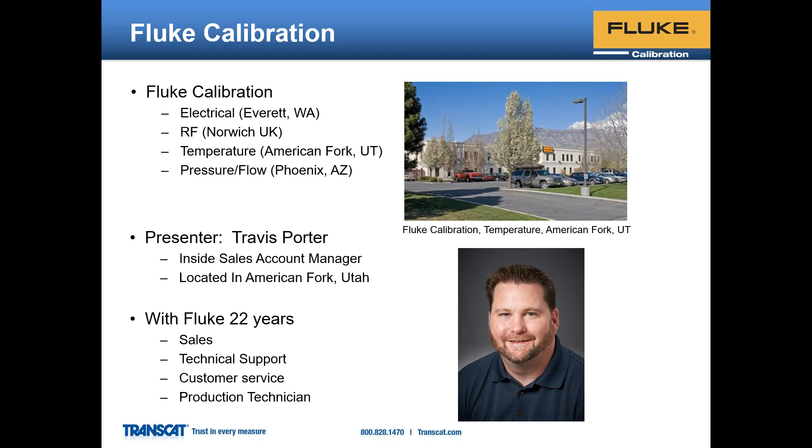Welcome everybody to this presentation on maintenance tips for temperature calibration equipment. Just real quick, I do have a little bit of allergies, so if you hear me quickly mute, it's probably because I had a quick sneeze come on. I'll do my best to avoid those, but basically we're going to talk about the equipment you've invested a lot of money in for your calibration lab and how to do some preventative maintenance. This is key to keep the units running at their very best and helping to reduce costly repairs and downtime.

So here's the agenda. We're going to start with our calibration baths, move to Drywells, and then to micro baths. So we'll get started on our big baths or standard baths.

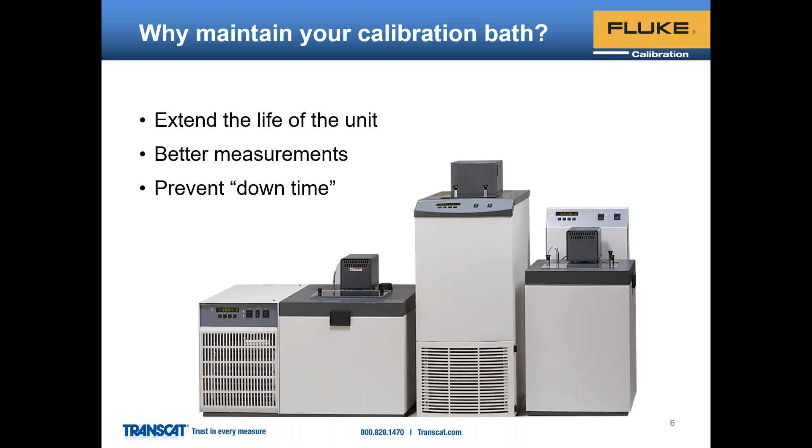Why do we want to maintain our units? Well, it's going to extend the life of the unit, provide us with better measurements, and prevent downtime or basically any untimely repairs that we were not prepared for.

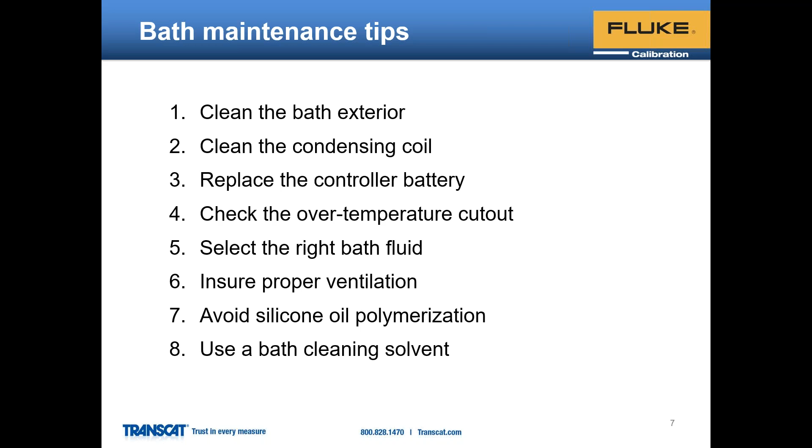We're going to go over some basic tips of cleaning the bath exterior, the condensing coil, and then we'll jump more into some of the controllers internal to the units, and also check the over temperature cutout and why that's a good idea. This will lead us into more general topics of selecting the right bath fluid, proper ventilation, what is polymerization of the fluid, and then a cleaning solvent if you do happen to have a problem where your oil does polymerize.

Basic maintenance is key. You don't want to spray anything directly onto the bath; you want to put it onto the towel or cloth being used. Ethanol works very good for a lot of the silicone cleanup and doesn't usually hurt the paint in any way. OS2 is a chemical you can get from Dow that helps dissolve silicone residue and silicone oil that's polymerized.

We'll talk a little bit more about that. When you're wiping, again, just wipe away all the silicone from the top of the unit. Another tip is when you're removing the probes from the bath, instead of coming straight forward and straight back, sometimes it's a good idea to go left or right. This way it avoids any potential fluid dripping down onto the controller at the front of the bath. Periodically wipe the unit down to remove the excessive silicone oil.

Silicone oil does creep - it gets everywhere. As it's used at higher temps, it kind of evaporates and condenses, so that's a reason for that.

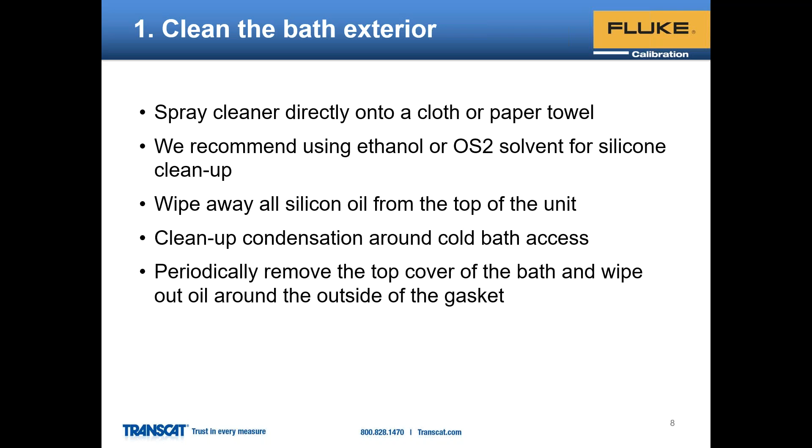You can also periodically remove the top cover of the bath. The baths do have a seal - it is not a liquid seal, but more a ventilation seal, where the lid sits on top of the tank. It is good practice every once in a while to wipe the oil out from underneath there to prevent any silicone creepage coming down the sides of the bath that may have condensed over time.

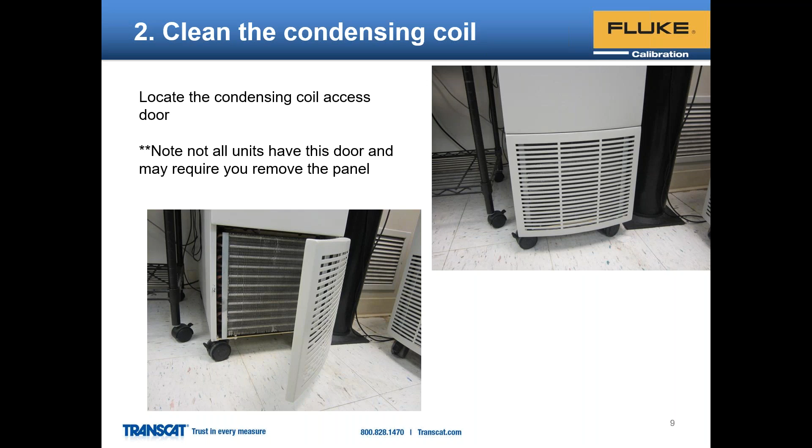The next thing we want to talk about, probably the most productive thing to do with your baths that have a condensing coil, is to actually clean these. Some of our baths have a door or access panel, like this one in this picture. Some you do have to remove the panel, usually just a few screws to remove that, and then you've got your internal condensing coil. You'll need to locate that based on the type of unit you have and whether you need to remove a panel or if it's got an access door.

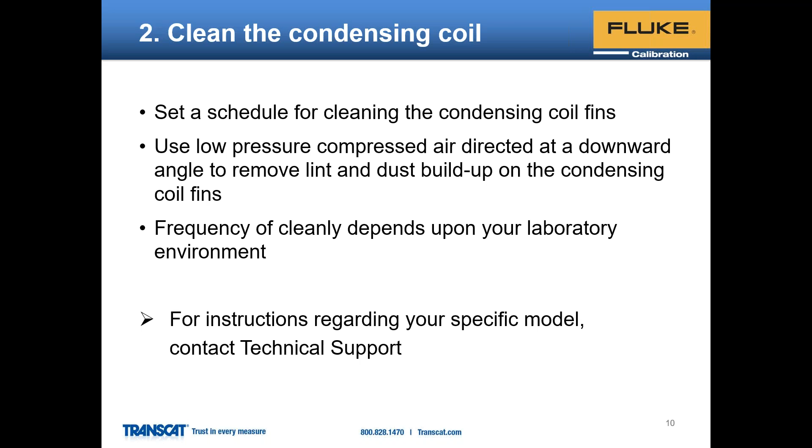It's really good to have a set schedule for cleaning the condensing coils and fins. This is relevant to the type of environment you're in. Most labs tend to be fairly clean, but I do have customers using baths in more of a production environment where it's not as clean, so dust and debris tends to build up more quickly on the condensing coils. Depending upon your environment, this may or may not be something you need to do monthly, every few months, or quarterly. It's up to what you deem necessary in your quality or maintenance scheduling.

Once you have access to the coils, you're just going to use a low pressure air source and blow off the debris. Some people will use a vacuum in tandem with this, as they blow it, they will vacuum up the dust that comes out as well.

If you notice any of the fins have become hit or bent, you can purchase a fin comb and give these a quick brush, and that will straighten the fins back up. With that, I would suggest, if you've never seen a fin comb used, to look it up on YouTube, because when you fin brush those, you are dealing with a really small gauge aluminum, so you've got to take some care in doing that, because if you jam it in there, potentially you can damage the condensing coil.

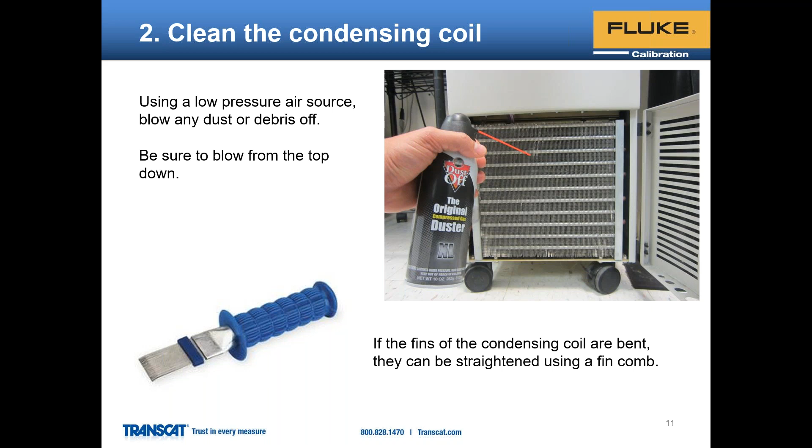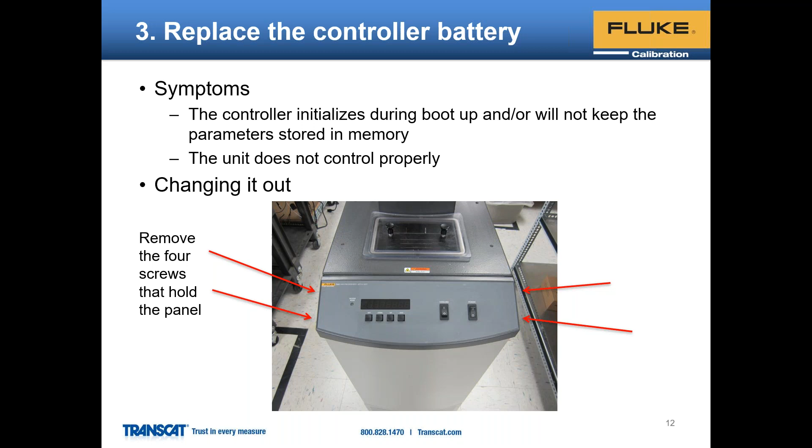There's a couple things you may notice that go wrong with the bath over time. Sometimes your controller will always say initialize, or show a short INIT every time you power the unit up. This is where your internal battery that controls the non-volatile RAM has kind of lost its charge. To get to this, you're going to remove the 4 little screws that hold the front panel on, and then the front panel will just lift, and you can hang it forward like in this example. Then it's basically a 3-volt coin battery that's on the display board.

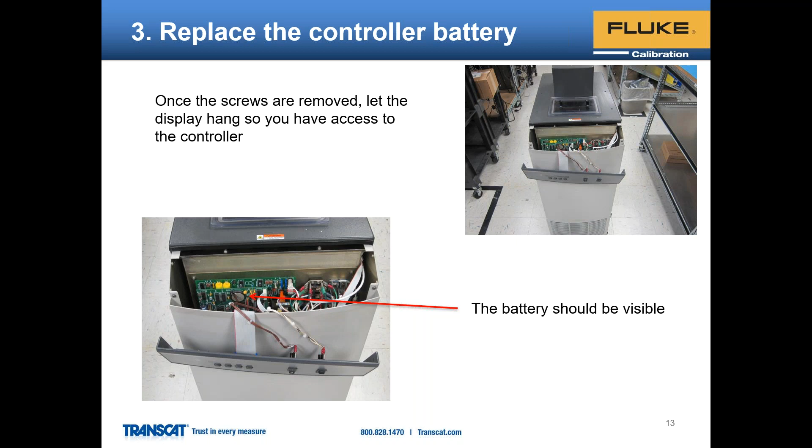When you're doing this, you want to have the unit not connected to any AC power. You don't want to be in there poking around with anything energized. Again, this is a 3-volt type coin battery. When I was in production, we would always make sure they were 3.3 volts or higher before we installed them. But to remove them, it's pretty simple, you can just use a little flat blade screwdriver to pry up the pressure fit and then slide it out.

Typical lifespan on these batteries is 7 to 8 years, I've even seen them go 10. It just depends on how much the bath is being powered on or off. Once you get the new coin battery installed, you will just, in reverse, set the display back on and install the 4 screws that were used to remove the panel.

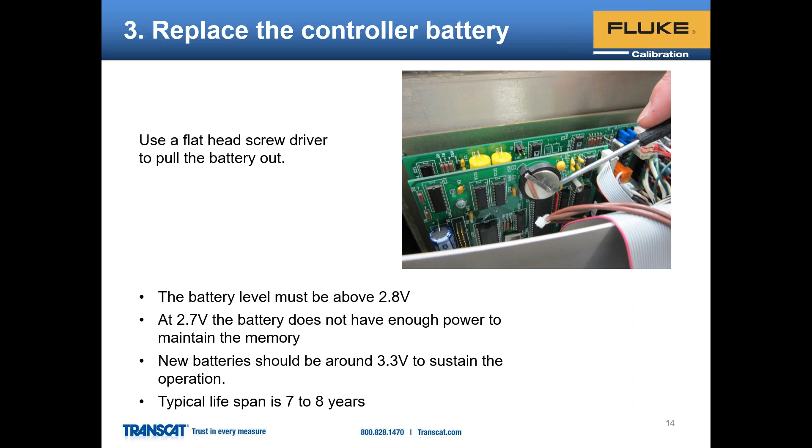The next thing some people will adjust, depending upon the bath and fluid, is the over temperature cutout. This is a built-in safety feature of the baths, all of them have that. Usually at the factory, the hard cutout is set at just a few degrees over the maximum temperature of the bath, because you want to be able to go to your max temperature but not bump into the cutout. But some people will limit this, or use the soft cutout setting, based on the fluid type they're using, so they do not overtemp the fluid. It's also sometimes good practice to set this down to a point where you will bump into it, just to make sure the temperature cutout or soft cutout is functioning.

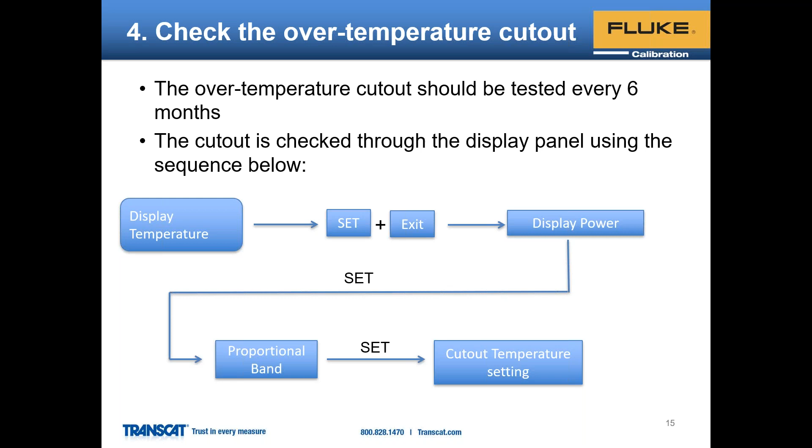To get to this setting is quite simple. You're just going to have the bath on and functioning, and hit the set and exit keys simultaneously. Once you do this, the unit's display will show a % power, which is for the heater controlling the bath, and then you'll hit set again. This will give you your proportional band setting, and if you hit set again, it'll say cutout, and there's the set point there where you can use the up or down arrow keys to take that set point up or down.

This is again something that most people will adjust based on the type of fluid that they're using, so they do not inadvertently overtemp the fluid. A lot of our baths have more capacity, and there is quite a variety of fluids in the industry. Unfortunately, we don't have a single fluid that works from very cold to very hot that we can use to get the performance specs that we need.

More or less a safety feature. Just in case something goes wrong in the bath, for instance, it runs into a thermal runaway situation - say we lose a cooler, and then it's just continually heating - this should cut out the power to the unit.

When the set point is bumped, the display triggers the relay, and it'll go into a flash cutout, and stay in that mode until the temperature of the bath comes down below that, and then it will reset that parameter and allow the power to go back through the circuit. So again, just something to check periodically, make sure it is working.

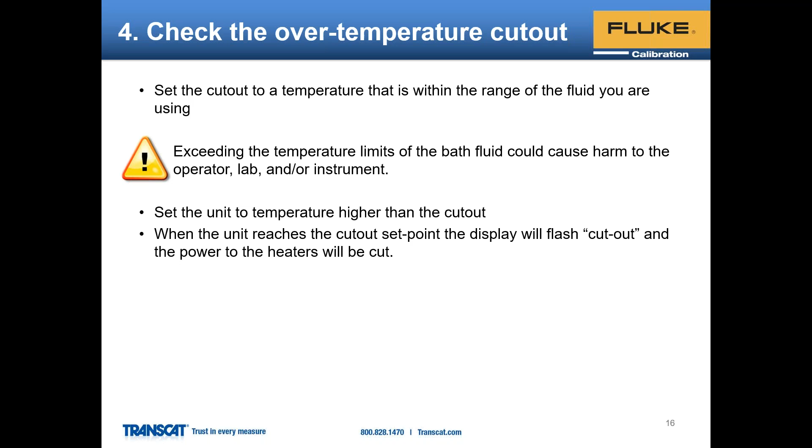Along with the cutout, we talked about different types of fluids. Unfortunately, we don't have something that performs as good as alcohol at -100 and as good as the bath salt at 550C. So a lot of times you have to use a variety of fluids, and usually this is temperature dependent on where you're going to be performing most of your test points.

Going off this sheet here, it kind of goes from the halocarbons and alcohol and the Dynalenes, which are usually typically used for more cold applications. Then you can get into the ethylene glycol or antifreeze and silicone and mineral oils, which are kind of middle of the road. And if you're running consistently above, say, 220 or so, a salt bath is actually the better solution long term.

Even though there's a little more investment up front, you will make that back in spades as far as the replacement of mineral oil, because most mineral oil, even the types rated for 300C, has quite a short life at that very top temperature range as the polymers bake off, and then they do start that polymerization buildup or polymerization chaining process.

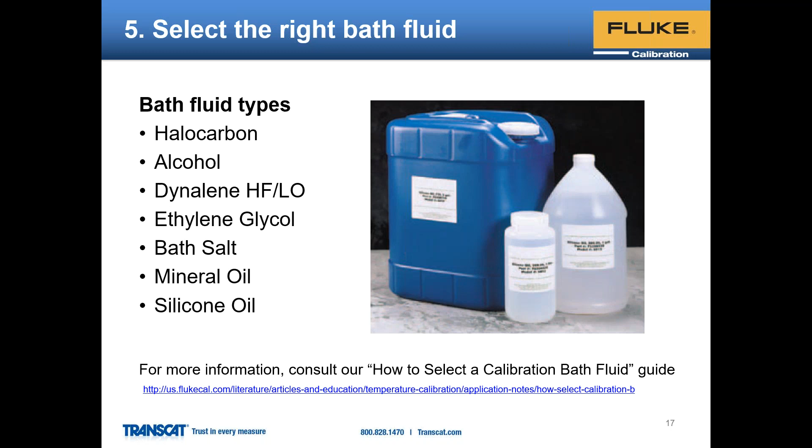One thing that can happen in the cold fluids, most common when using alcohols or ethanol, methanol, or halocarbon, is water can build up in the fluid and basically cause icing. When this ice forms, the cooling capacity of your bath is going to be degraded.

Depending on where you're holding temperature to, and how long, and what the conditions are of the lab or space that you're working in - I've seen alcohols ice in as little as a month where they have to be replaced, or I've seen them go almost a year, about 9-10 months if you're in a fairly dry environment.

One thing we did notice in our lab is that ethanol versus methanol, the ethanol does saturate at a much higher rate than methanol. But there are some considerations when using methanol, and some people don't like the additional safety concerns that need to be considered.

The other thing too with halocarbon is you can actually turn off the bath and just allow the unit to sit, and the ice and/or water in the fluid will actually separate and float on top of that, and it can be ladled off.

Once you get the majority of it ladled off, you can then slowly heat the fluid up to around 90C and approach close to 100, and boil off the remainder of the water that's condensed into that type of fluid.

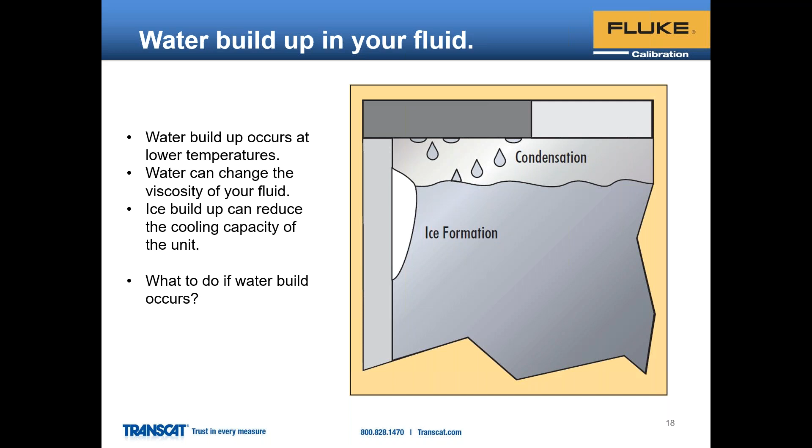With any of the baths, and this is more typical for the hot baths where you're using oils that off-gas or the salts, you do want to have proper ventilation. We do have a fume hood recommendation based on different oil types, so if anybody needs that, that's on our website.

Basically what we've done in our lab is we have about a 600 CFM fan that vents out, and then we basically created a trunk with legs that come down to the various baths.

To pull the off gases out of the lab, making a much better environment for our technicians. So, good.

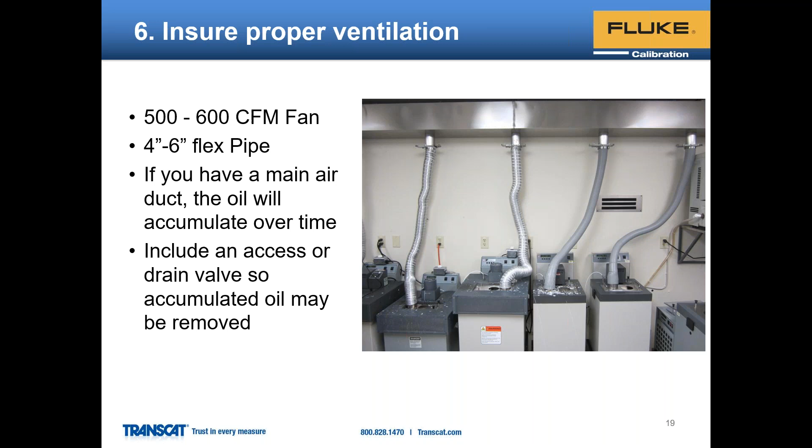Sometimes too with the silicone oils, you do want to have, instead of just going straight up at the top, kind of a little U in the pipe. So as the evaporated oil collects and condenses, we can drain that. I don't have a good picture of that here, but that's another little tip we've found over the years - having almost like a U or P-trap type design where we can drain it out. It's very helpful that way versus getting oil sucked up straight through into the ducting.

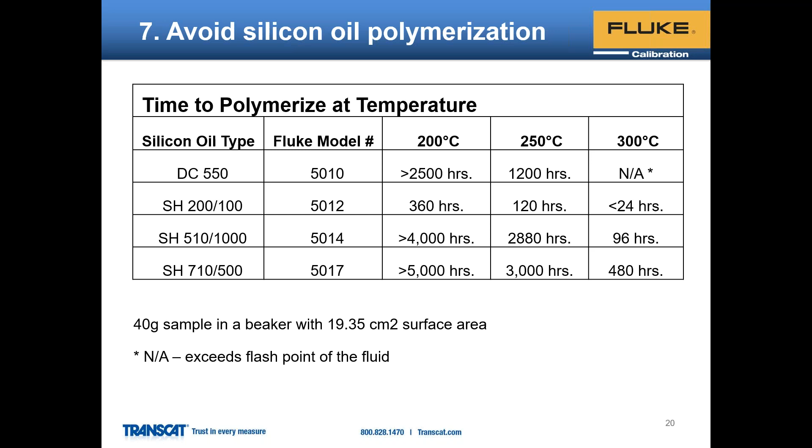If you're using things exclusively between 220-250 C, I would recommend that you move to a salt bath, just because that fluid will outlast the bath. I've had several customers that have used the fluid, which is the original fluid, for 10, 15, 20 years. The bath, which is a nitrate-nitrite mix, rarely is going to cook off any of the properties. What happens over time with the bath salt is the low end melt point tends to raise by about 20 degrees as some of the nitrates and nitrites change states. But other than that, it's pretty much one and done, versus replacing some of these higher temp fluids, which can be fairly expensive.

So if you do run into a situation where one of your silicone baths does polymerize, this is the stuff you want to get - it's from Dow Corning, called OS2. It helps soften and remove the silicone oil that's kind of chained and become almost like a silicone. It's odorless, evaporates, really good for cleanup.

Another couple of tell-tale signs to watch for with your silicone oils is over time, with some of the higher temp applications, they can discolor. They'll go from a clear to more of a honey color. That doesn't always mean it's going to polymerize, but it's just showing the oxidation. I've also seen the polymerization process take place with the fluid being completely clear and looking new. So for each application, you're going to have to keep an eye on it.

Usually you'll start to see what looks to appear like little bubbles if the polymerization is occurring in the clear fluid. It just looks like little pockets of these chained molecules, basically making pockets of little gelled plastic in there. But another sign, if you have a larger bath, is if the stability of the unit starts to waver and it's been working fine thus far. Sometimes the stability will be an indication that the fluid is starting to lose its life there.

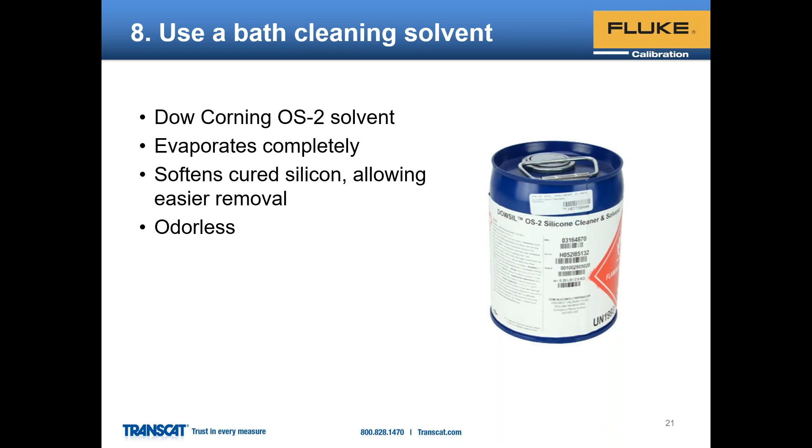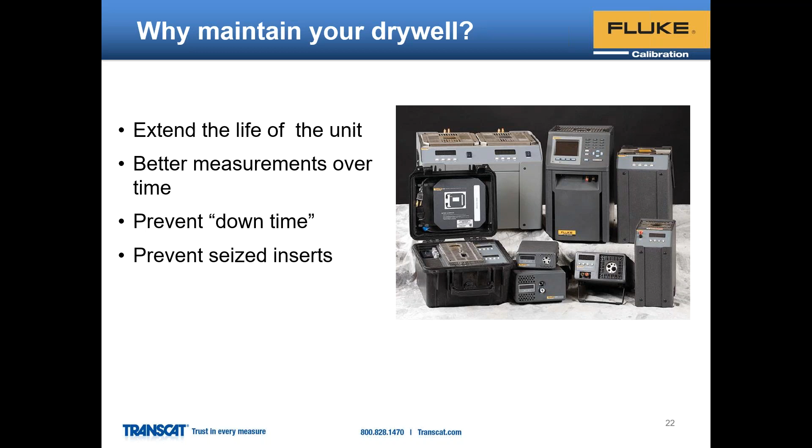All right, so now we're going to move on to our Drywell section. Same basic concept - why would you want to maintain your Drywell? We're going to make sure that the measurements are maintained, prevent some downtime, and more so in Drywells, when we get into the styles with the metal blocks that are removable, the cleaning of the inserts prevents them from getting seized or stuck.

Same basic concept - you're going to clean the exterior of the Drywell, not spraying directly onto the well. You do want to clean the guards at the top and bottom of the unit. There's usually, on most units, a fan, and it usually blows bottom up, so you will get dust or debris underneath. Same concept there with the fins - you can use an air source and/or vacuum to help with that.

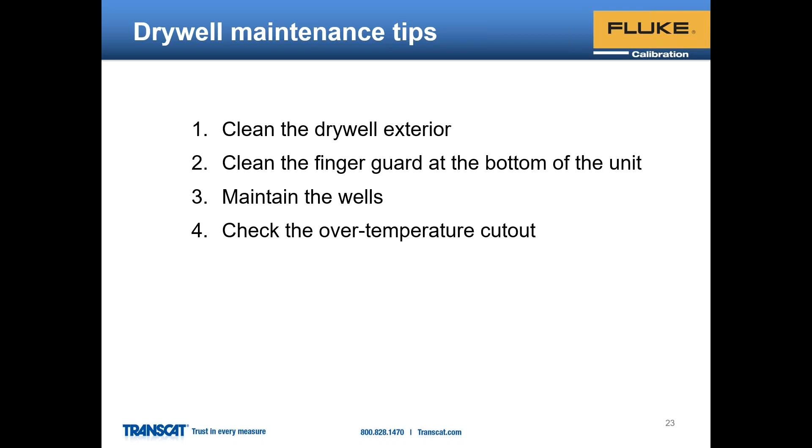With this one too, we're also going to show you how to check the temperature cutout. Wipe with the cloth or towel, spray it onto it - ethanol is recommended. Most of our units have fairly robust paint and plastic, but a lot of people also use Simple Green, 409, Windex, or other cleaners if they don't have a good source of ethanol in the shop.

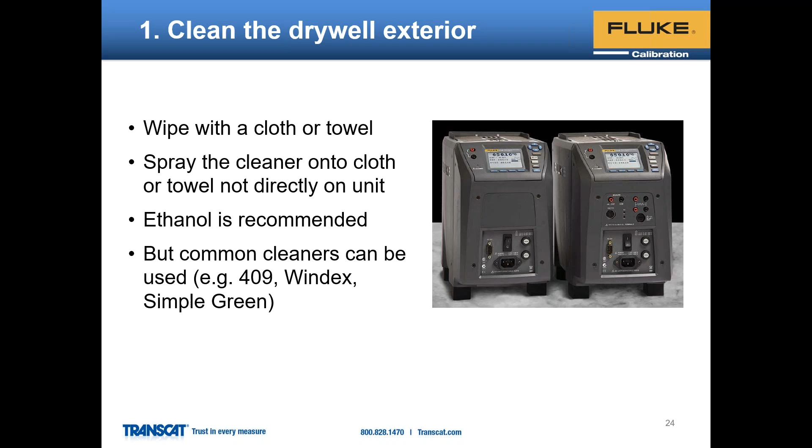So again, when we say keep the well clean and clear of foreign matter, you don't want to use any fluid to clean out the well. Again, just air, potentially in a vacuum.

You never want to use any thermal grease or paste with any of our dry wells. We mill the inserts to such a tight tolerance that they provide good thermal conductivity between the block and inserts without the need of this. And what actually happens with most thermal grease is it becomes a glue over time.

So I've seen many inserts basically get glued into place while people try to fill these micro gaps. The oxidation on the inserts happens on both hot and cold dry wells, a little more prevalent with the hot ones, causing the brass colored inserts to go dark or almost black. For the aluminum inserts, they just go to a scaly white. But again, Scotch-Brite works really well, usually the maroon type, or a 400 grit sandpaper.

If by any chance you happen to drop one of the sleeves and it hits something hard or the floor, please give it a good once over before inserting it into the wells. What can happen is if you get a micro burr or a ding in the insert, this can cause, especially in the higher temp ones, the oxidation to bridge from that little ding in the insert, and that can cause them to stick.

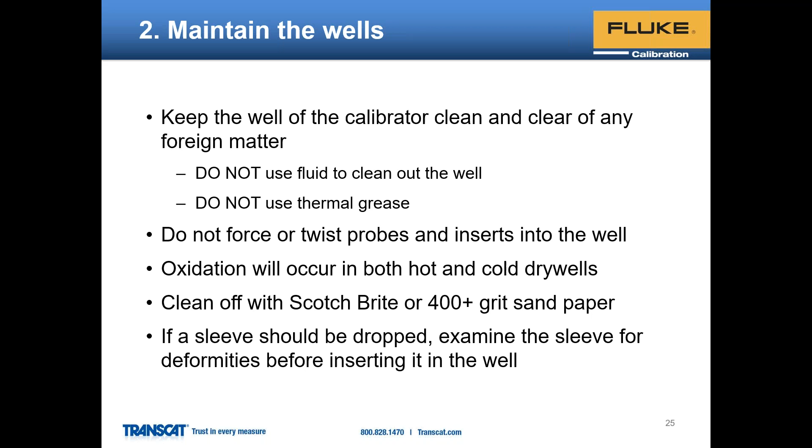Another piece of equipment that's really good to have on hand to go down into the well holes themselves is a typical gun cleaning kit with some pipe cleaners. That helps remove the oxidation internally with the little brass brushes.

But again, as you're placing the inserts in or out of the wells, you want to use the removal tool and avoid just dropping them into the well, because if you do drop them in, the control sensors reside at the bottom of the well, and that physical shock is like tapping it, which can cause the units to drift over time.

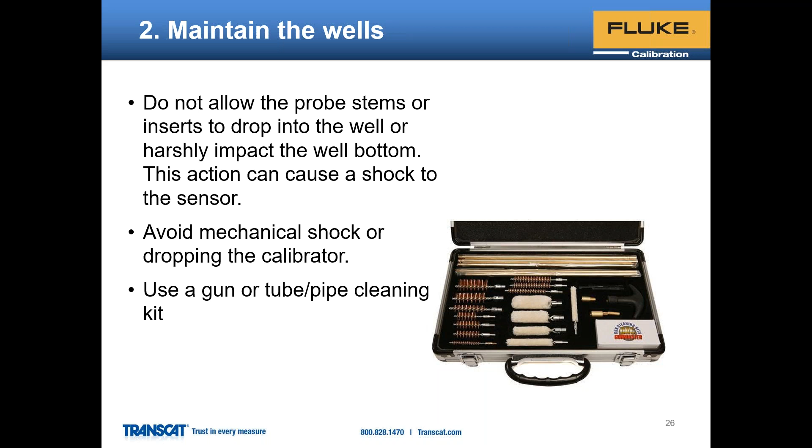All right, so in most of our equipment, you can see here the over temp cutout. We've tried to make most of our controllers behave similarly as far as getting to different features within the unit, and this one follows the same kind of setup as the bath one we just reviewed.

So again, you're going to hit set and exit. The unit will display the percent power. You'll hit set again and see the proportional banding. Here with the proportional banding with dry wells, you typically never want to change this, as they are optimized. However, on the baths previously, sometimes you can optimize them based on fluid type and temperature, since sometimes the baths will have something different than what was set at the factory.

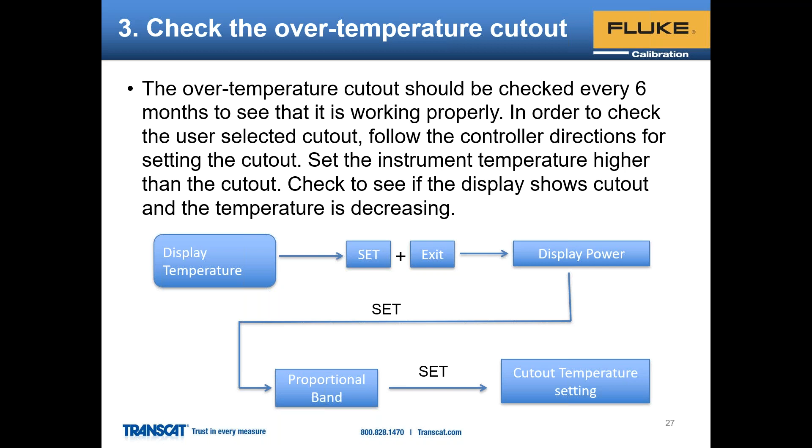And then once you hit set again, you're going to see the cutout temperature. Internally there's the hard one that is set, and then this one is actually the soft one. So sometimes people will use it to prevent the overtemping of a probe in a test process versus a fluid.

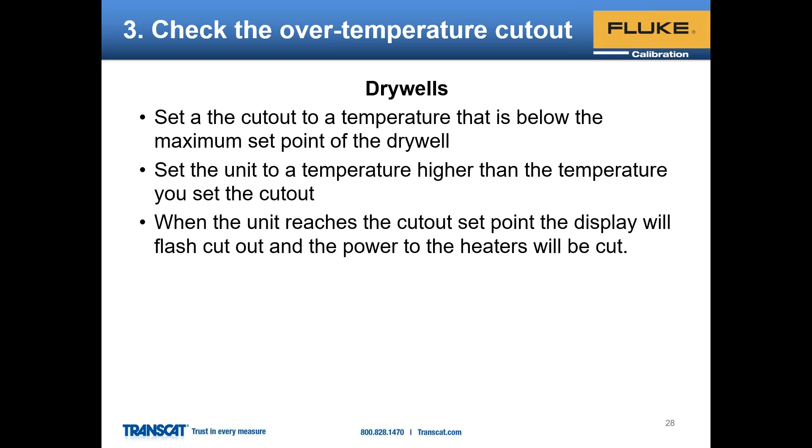So again, you can pull that back and run a quick check, pull it back to say a higher temp one. You can set it to 100 C and set the unit to 110. And as it ramps up, the unit should trigger that, and stop the power until the unit drops back below that.

And this is the same for what we call our metrology wells. So you go to the display temperature and you'll get to the cutout in much the same way. This one is a little different, but again, very similar in the way we've designed the menus across our product line.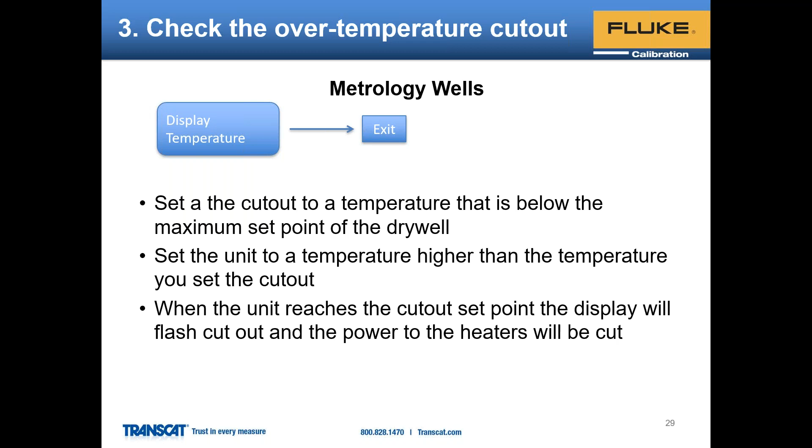And now we'll move into our micro and small baths. Again, same concept here - why are we doing this? To keep our measurements in check and to prevent downtime. So we've got here our micro bath series on the right, which is our 6102, 7102, and 7103.

And then on the left, we are now showing our new tri-clamp baths, which are a little bit different. They have a full stainless steel design, a little bit different stir mechanism, and work well with a tri-clamp or clover type sensor, but they also work as a great small bath as well.

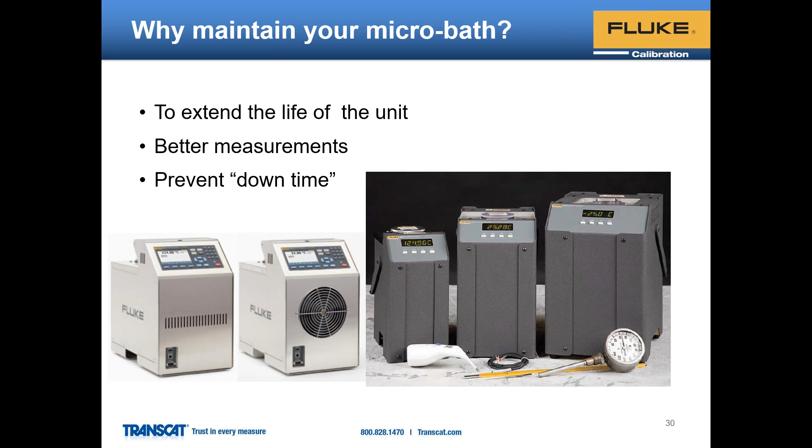And these are also our first baths to come to market with a NVLAP accredited calibration versus traceable like our legacy products. All right, some of our tips we're going to talk about with the micro baths and small baths.

is cleaning the exterior of the bath. We're going to check the stir motor speed, show you the stir bar in the micro bath, and then why it's important to avoid using water in the 7102 micro bath.

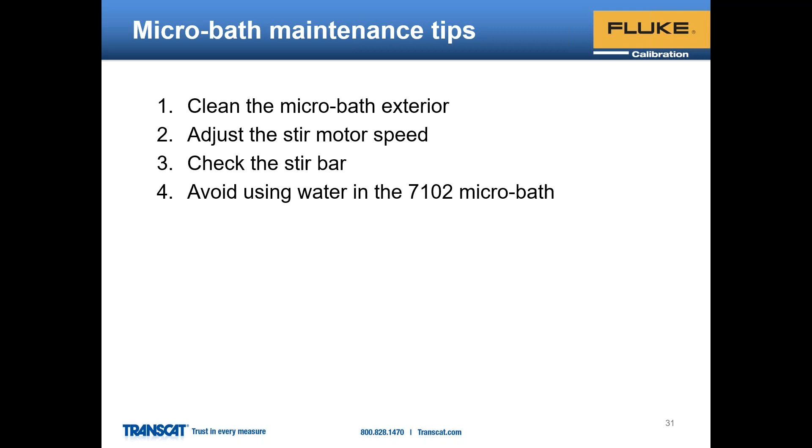So again, usually want to work top down. Since these baths do use silicone oils mostly, you do want to try to avoid getting that internally. So if they are not in use or you've drained the fluid, I always recommend just placing a shop towel in the tank itself to help absorb some of that residual fluid, and then put the transport lid on.

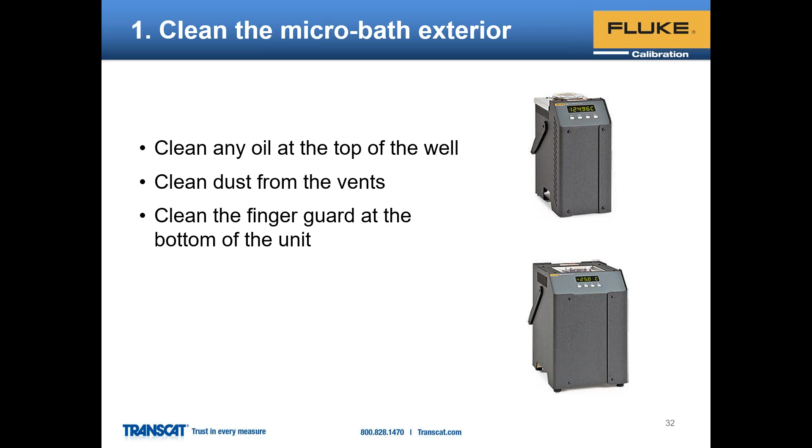So again, same concept here. You can use an air source or low pressure air to remove dust from the vents and different parts. Give it a good cleaning that way, then do a quick wipe on the external, again spraying onto the cloth or towel, not directly to the unit.

As far as the stir motor speed, some people will adjust this depending upon the fluid they're using and temperature. Sometimes over time they may need a little more stability, or sometimes I've seen them slow down the stir speed if it was cavitating. Usually not a typical problem.

And I've seen people change these inadvertently. So sometimes if you get the stir speeds too fast, they will throw the stir bar outside of the magnetic field that is making the stir motor work.

So this is just showing again, this one is for the 6109, 7109. Instead of going into the set and exit, we now have a setup button, which you go into the instrument, which is an F2 button. There's a series of F1 through 4 on the display. You'll go instrument, then more, F4, control.

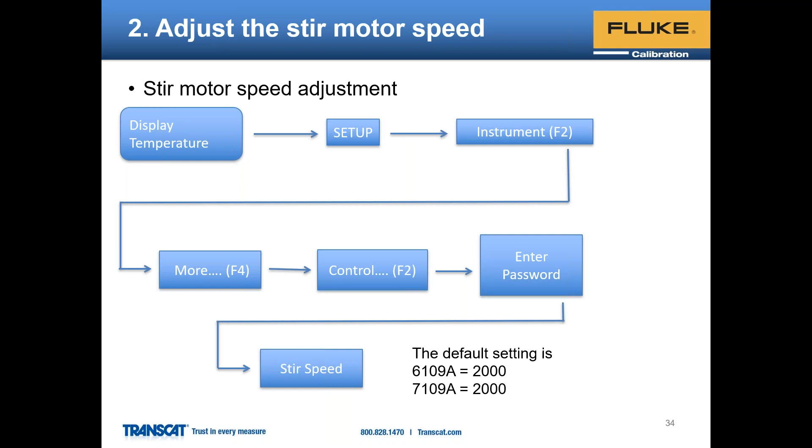All right, now moving on. Over time, the stir bars will lose their magnetism with time and usage, so periodically you'll want to replace them.

And again, this is sometimes to do with the stir speed we talked about. Sometimes if that common set point is causing them to get tossed outside the magnetic field, you may want to replace these. And since they are magnetic, it's quite easy to get them out.

You just remove the internal basket and then reach down there with something metal that's magnetized, and it'll click onto it. You pull it out, and you can simply set the new one down in there.

And we touched on too why it is not good to use water in the 7102. This one uses a little bit different tank. It's an aluminum tank versus stainless steel, so it wasn't designed to be used with water, just the silicone oil.

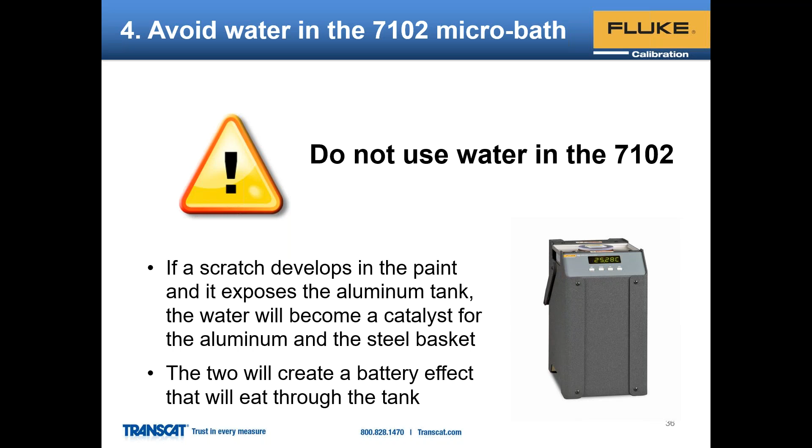So if over time the tank gets exposed or becomes scratched, and you use water in it, between the magnetic field and some of the stainless parts and the aluminum, you'll create a battery effect, and it'll actually eat through the tank. So with the 7102, you always want to use a silicone oil.